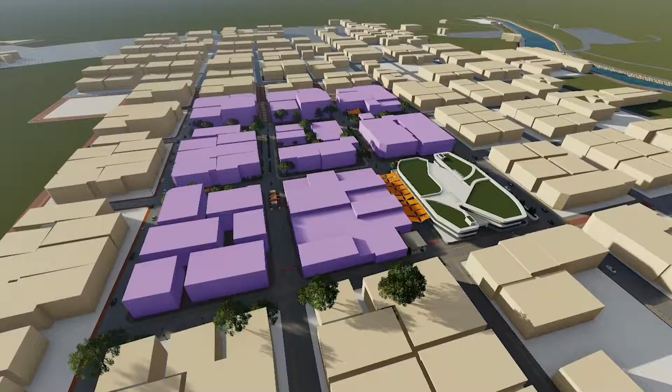In this project exploration, my main proposal is the incorporation and designing of a Superblock and Walkable City. As an independent city center of the region, it has been covered with commercial structures and institutional facilities. Some recreational areas are being transformed into business sectors, and on the other hand, the population density is also rising more than the expected estimate.

However, the increase of population does not make a tight sense of community. Through history, humans have always lived in small, tight-knit communities and relied on them for survival. Recently, we've moved toward a much more isolated way of life. This can be the cause of rising levels of depression, anxiety, PTSD, and even growing levels of divisiveness, based on the study of Sebastian Junger.

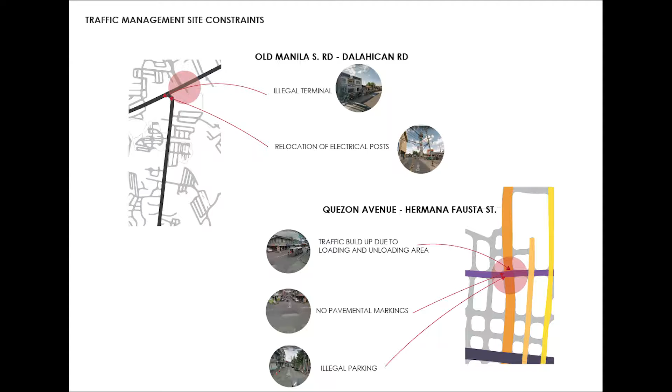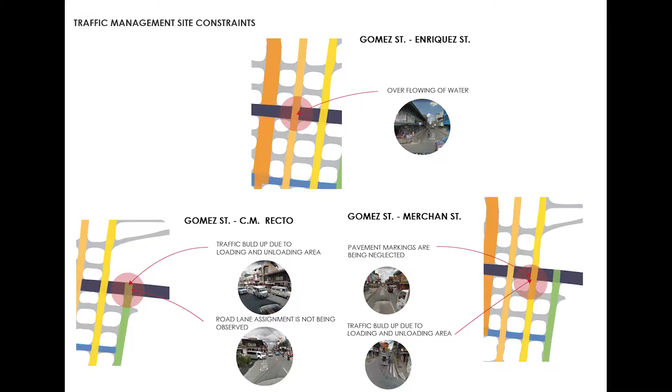With this being said, an increasing number of people are more drawn to individuality and lack a sense of community. People are also dealing with lack of safety and comfortability in recreational and community activation spaces. Other effects of population increase are congestion and unorganization in road networks. These are the rising problems based on the CLUP of Lucena City.

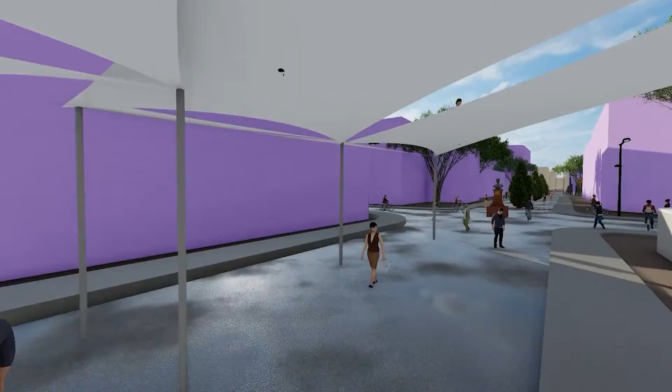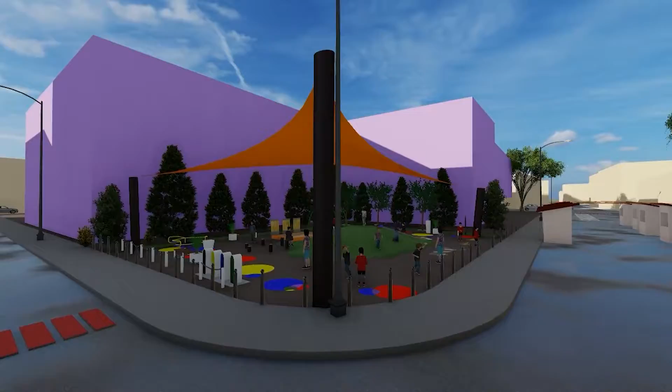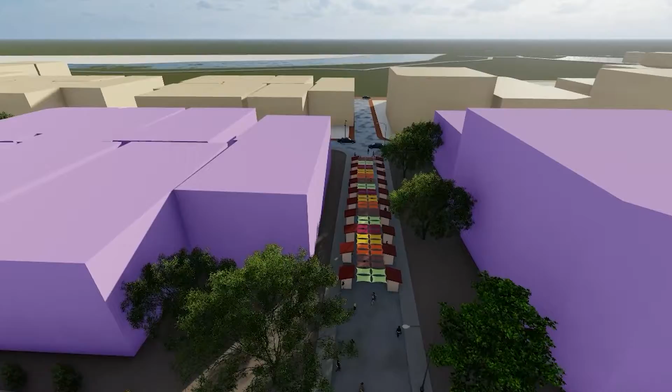This project aims to acquire and achieve a walkable city, a community-activated block, people-attracting hubs, and bypass or alternative routes, envisioning a safe, comfortable, and interesting pedestrian network. By promoting a walkable city and increasing the activities at the ground level, it turns an urban neighborhood into a village where kids could play on the street, a space that could be used for sports, entertainment, culture, knowledge, and arts.

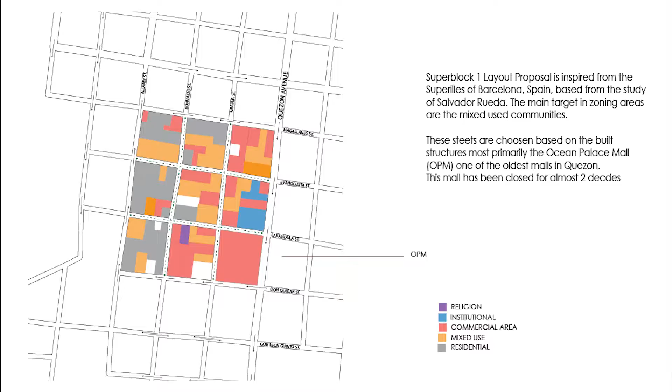In identifying a place for the Superblock, according to its proponent Salvador Rueda, we must look for a mixed social composition. This particular block is a combination of typologies and a combination of different people from different statuses. This makes the space more engaging, having a portion of business or commercial area and another portion of residential area.

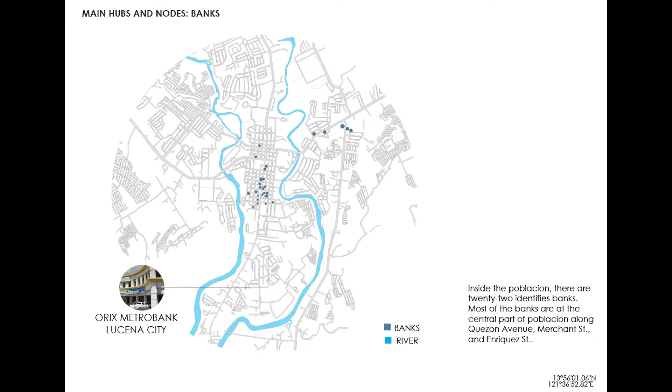Aside from mixed-use composition, some of the parameters I have considered is avoiding the banks. As the finance center of Southern Tagalog, no wonder this city has various banks all over the place. These handle a huge and crucial role in controlling a large part of the money circulation supply, holding the economic stability of the city and the larger scale region.

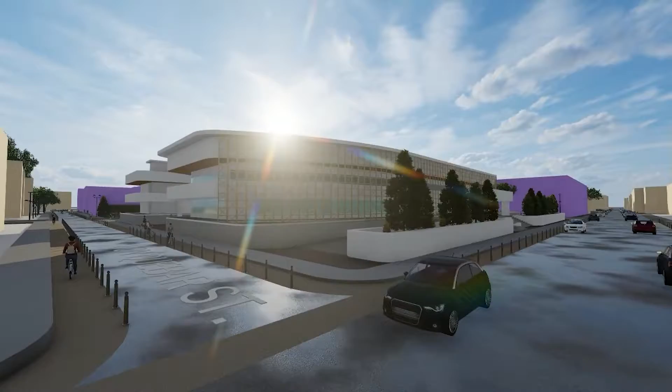One of the highlights of the area is the old Oceanic Palace Super Mall, which is at the edge of the Superblock. It was the grandest mall in the late 90s but no longer operated after two major malls started operating in the city. Making the most out of the space of the abandoned mall, I have designed it to be one of the major hubs inside the Superblock.

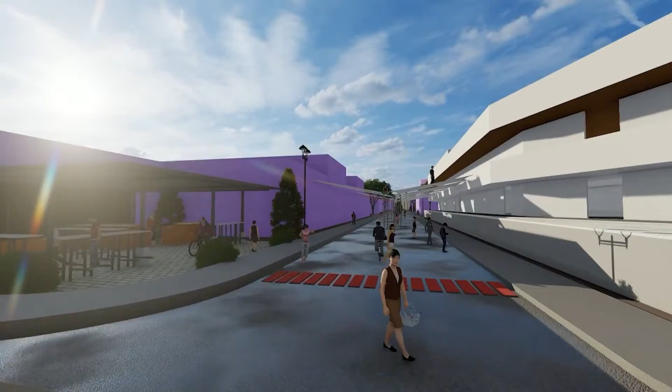This mall will be turned into a multi-purpose center. Its ground floor will be used for commercial space lease and an administration office of the Superblock to ensure the organization and effectivity of the design community project.

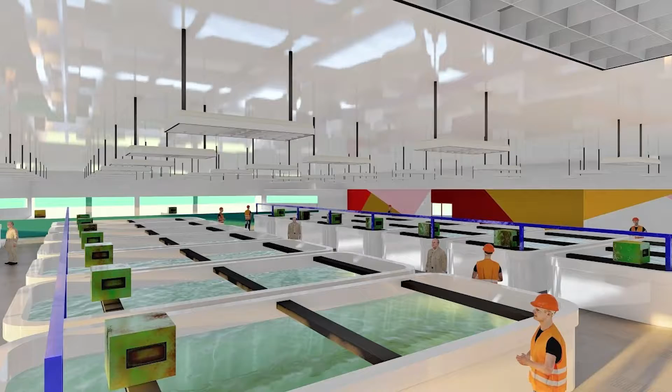The second floor will be an urban farming aquaponics area, which will be open and free for the public as long as they take care and take responsibility for the products that they will harvest.

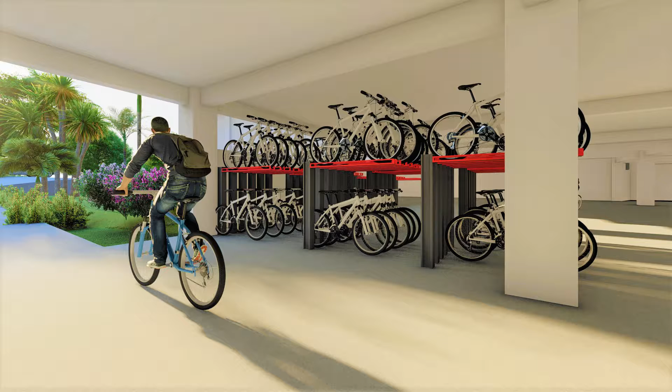Basement one will be allocated as a bike parking area, and a portion of that floor will be an emergency vehicle parking space for the bikers. Whenever they would be stuck due to heavy rainfall, it will be a system-operated vehicle that only bikers with cards, under the city regulation system, are allowed to take.

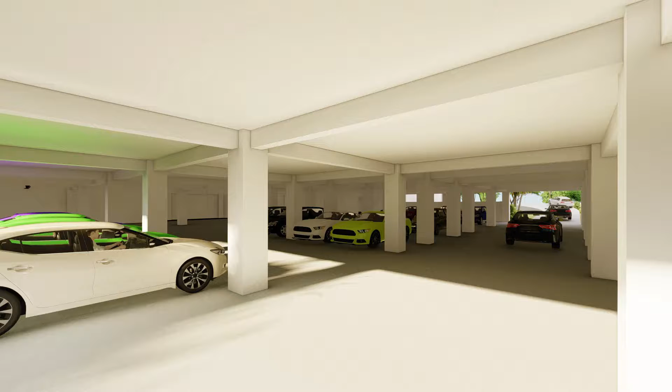And lastly, basement 2 will be the city parking. Mostly in the whole poblacion, cars are all parked alongside the walkways, which causes traffic and congestion. Providing a parking space for them will eventually lessen the congestion and pollution, the same as with the card system for the bikes, where they could be transported by the use of tap cards.

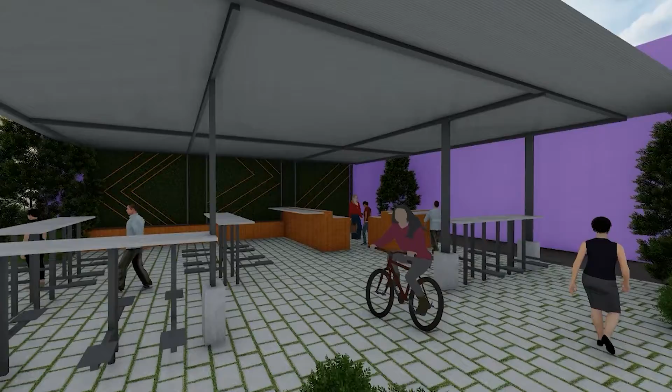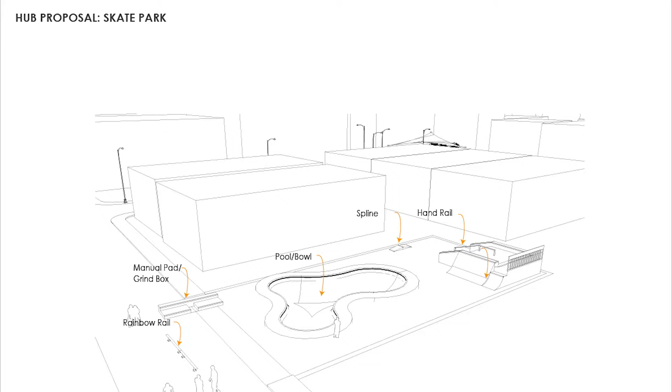In promoting the bike as a mode of transportation, this Superblock also caters a hub that is an on-the-go biker's nook, where bikers who are in a rush will still have time to either take out or dine in without detaching on their bikes. Another hub is a skate park, promoting a safe recreational activity for the youth and an activity that will develop their social awareness and knowledge.

As stated by Nerina Caltabiano, a psychologist, social capital, support, and sense of connection with place are recognized components of human well-being. Social capital supports health benefits to be derived from skateboarding and skate parks.

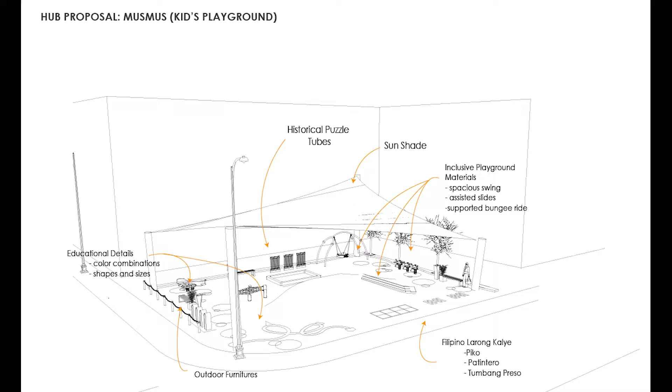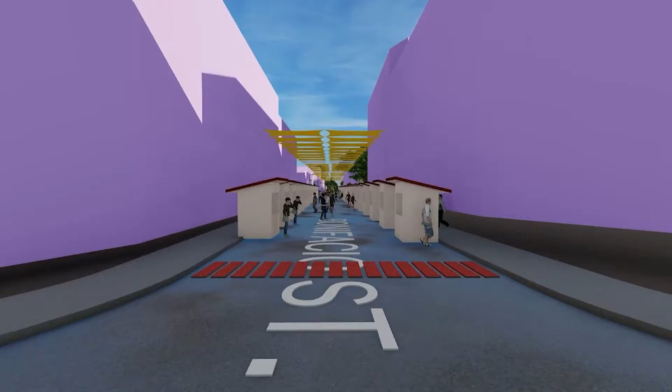Lastly, for the hubs, an inclusive park that considers assistance for kids, this playground is inspired from Harper's Playground. It caters different playground equipment like spacious swings and assisted slides. This playground could also hone the sense of culture of the young ones. Filipino larong kalye is introduced, and at the same time, logical thinking in the form of cultural awareness could also be improved with the historical puzzle tubes by turning the tubes to complete a form or a picture.

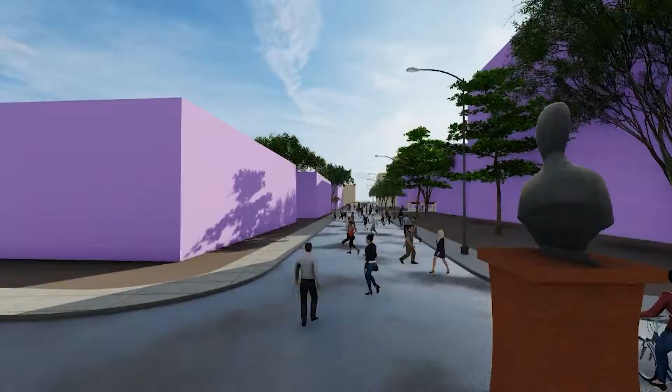Additional feature the Superblock could offer is stalls all over the designated area to boost social interaction and economic growth in the block. Most of the stalls are located at the outer part of the Superblock to attract and engage the people outside it. The notable landmark inside the block is the monumental statues of the local heroes of Lucena.

Here are the 4 statues. First is the Franciscan priest Juan de Plasencia and Diego de Oropesa. Lucena City first appeared in records under the name of Tayabas when it was found by them.

Second is Reverend Father Mariano Granja. The town's name was officially changed to Lucena in honor of this Spanish friar.

Third is Jose Zaballero. During the Philippine Revolution in 1896, he was the captain municipal who led the local revolution. Lastly, Don Gregorio Marquez, who became the first elected president under the revolutionary government of Emilio Aguinaldo.

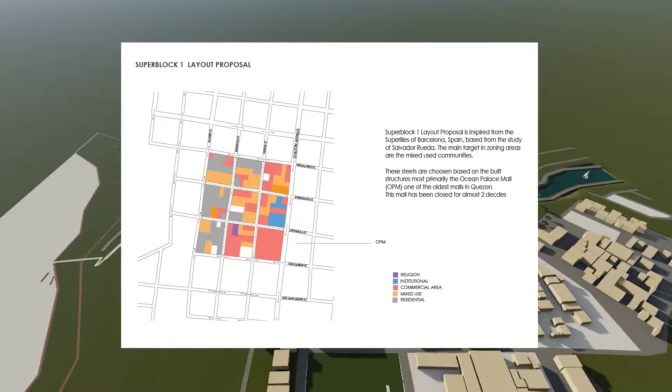This Superblock has also allocated a public toilet, potable water fountain, segregated trash bins, tactile markers to indicate that you are approaching the end of the block, and pockets or lanes of green spaces.

Presence of the park had a positive association with frequency of sport activity, total walking time, and psychological aspects. In incorporating the walkable city, Jeff Speck, the planner and designer of Walkable City, has given out 4 pointers to consider a pedestrian-friendly walkway.

First is for the roads to be safe and feel safe. Second is for it to be comfortable. Third is having a proper reason to walk. And lastly, interesting. These parameters are achieved in the Superblock.

Now, going outside the Superblock is a different case. The city is linked to its neighboring towns, cities, and provinces through various transports. The most used transport network is by roads. The city's core is dominated by merchandising and service establishments, while manufacturing concerns are located in designated areas of the outskirts of the city.

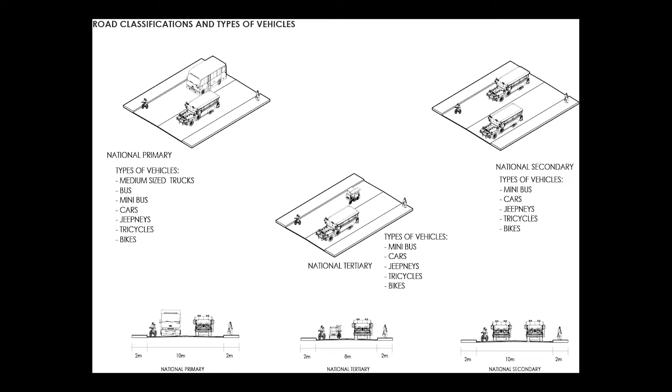Situated in 3 different types of roads, data were collected and analyzed. Both national primary and secondary roads have a larger length of 10 meters to accommodate more vehicles, and 8 meters for the national tertiary. Here are the redesigns of the roads, where every classification has a road where emergency vehicles like fire trucks are considered, to ensure that the flow of the network could cater to any emergency situations.

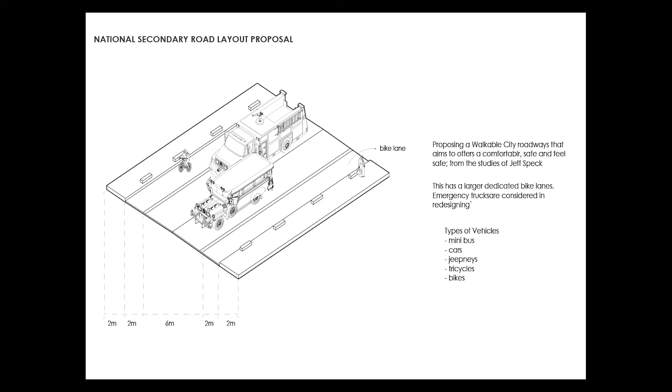By adding a bike lane and a proper area for pedestrian walkway, narrowing down the road tends to slow down the vehicles. Additional for the study is planning out a bicycle network and parking provisions outside the Superblock. By closing a number of streets and narrowing down the roads to cater to the density of vehicles, it is recommended to provide an alternative route or a bypass road.

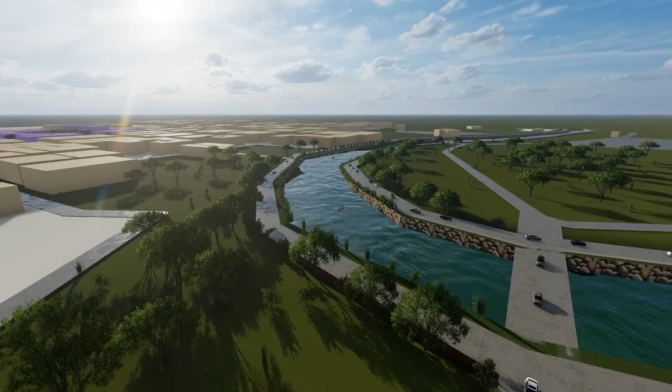This alternative two-way route is located at the riverside, together with the bike lane, river walkway, slope protection, and the mangrove lane at the riverside.

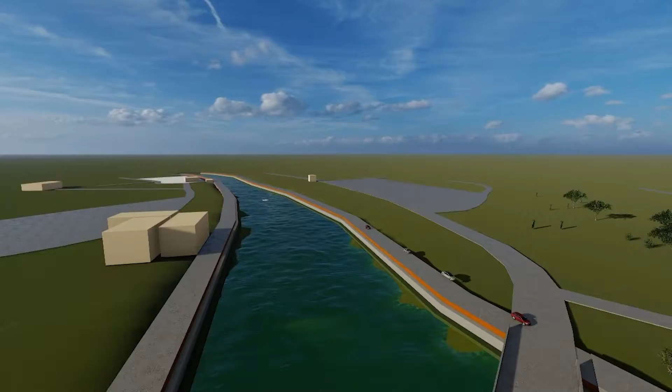Given the project proposals, each is fully supported by studies and theories. Generally, to maintain community-activated spaces, architecture could not stand alone in an urban setting without a proper implementation and law restrictions coming from the local government unit.